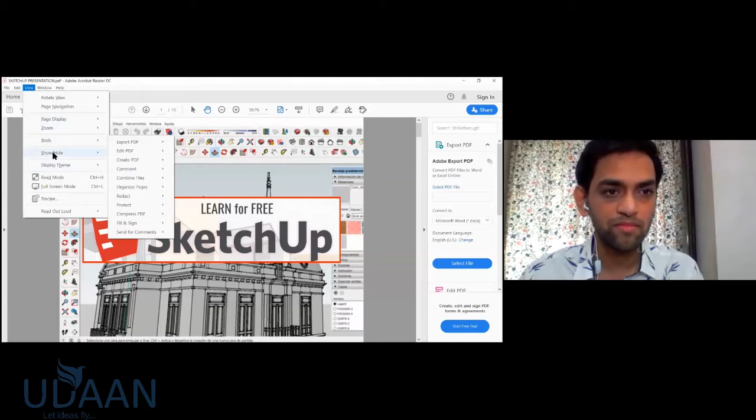SketchUp is a software used by architects and interior designers, also by product designers and furniture designers, which helps to make a 3D output before the actual object or building is actually made. So this helps the client to visualize what he is going to invest in. SketchUp is used in architecture, landscape design, civil and mechanical engineering, film and video game design.

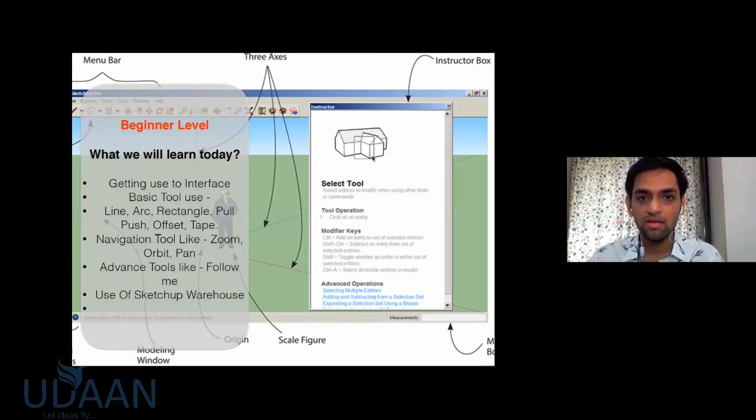So today we will learn about the basic interface of SketchUp, tools like line, arc, rectangle, push/pull, offset, tape, etc. So you get a basic idea how you can model your complex geometry in this software. Here are some of my works which I've done for myself and also for some of the clients which I handle personally. This is a thesis project of my friend, for which I did a SketchUp model. This took just 24 hours, and in 24 hours you can produce such a nice and beautiful model.

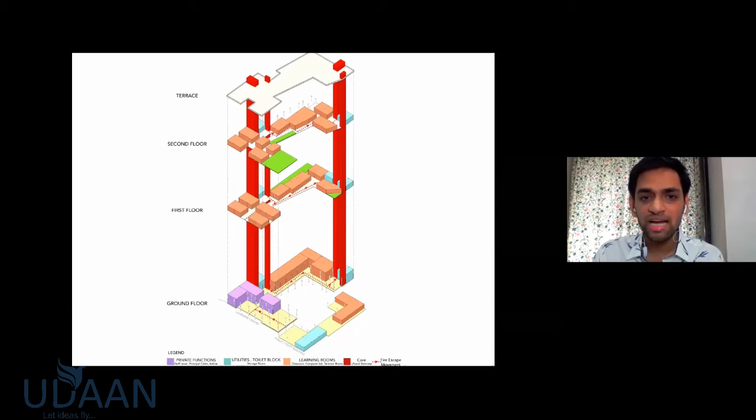Whatever you have in your mind or whatever you have on your paper, it can go into views and be presented as a JPEG image, or it can also be used in a diagram format, or as a wireframe conceptual drawing if you want. So it not just produces the views, but it also helps to produce diagrams and axonometric views.

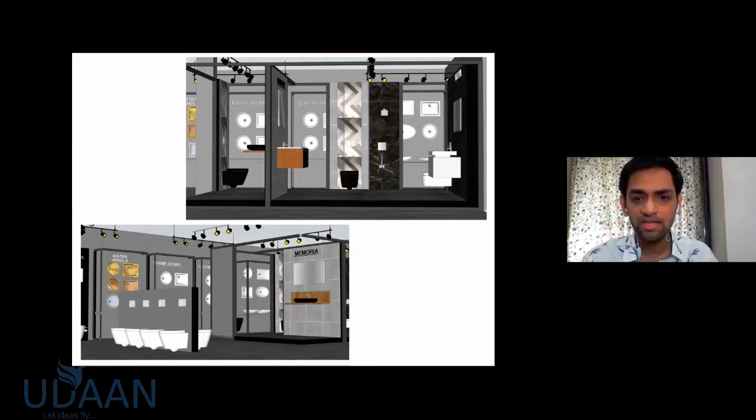This is an interior lift lobby of one of my clients, and these are two options which we made. Also, this is the interior of a shop. It's a sanitary ware shop. This is the interiors of an office building. The client was not able to visualize the space between the two chairs and the space in the meeting room and conference room. So we just made this 3D and gave them these axonometric shots, and then he was able to visualize what he's going to invest in.

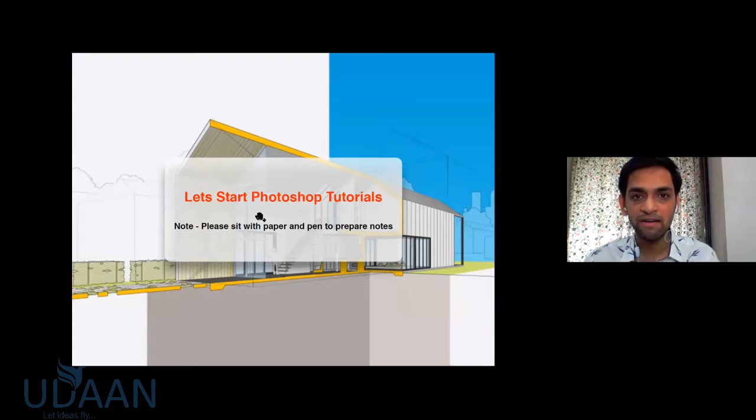So let's start SketchUp. Also, if you want to take down notes, you can go and get your pen and paper, and then we can start with the actual software. So should I wait or should I just continue?

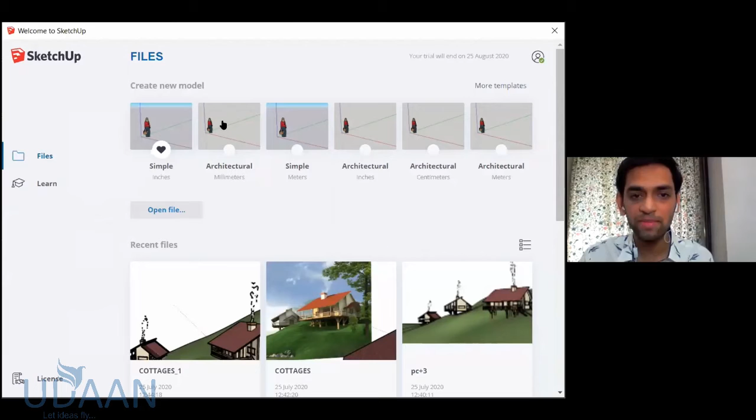I will start by sharing my screen and show you what are the basic tools which you need to start SketchUp. So whenever you start SketchUp, there is this box which appears. There are various templates which you can choose, but I will choose architectural millimeter over here because architects work in millimeter.

Is my screen sharing? 1 minute. Yeah. So yeah, can you see my screen? Yes. Okay.

So here on the top bar there are few tools. Also there are tools from this drop down menu. I will show you some of the tools, and these tools will help you to do the maximum of your work. But if it's a very complex kind of geometry, then we will go for an advanced lecture in this.

So I will start with this line tool. Line tool is basically just like a pen, and like a pen you draw freely. You can just draw whatever you want. Also, you see over here on the left hand side bottom, there is something called measurement. So whatever is in this SketchUp software is in real dimension, and it exists in the real world.

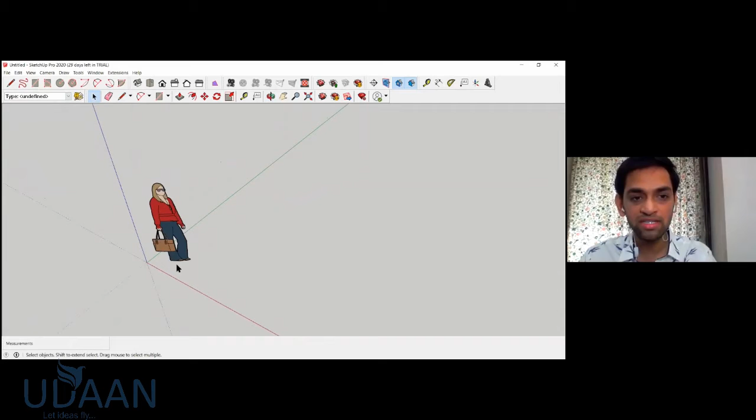So if you see this lady over here, SketchUp provides this one human figure in every version of the software. So everything we design is in relation with this human being. So just for an example, they have given this human. If you just measure the height, it's 1687 mm, which is the actual height of an average human being.

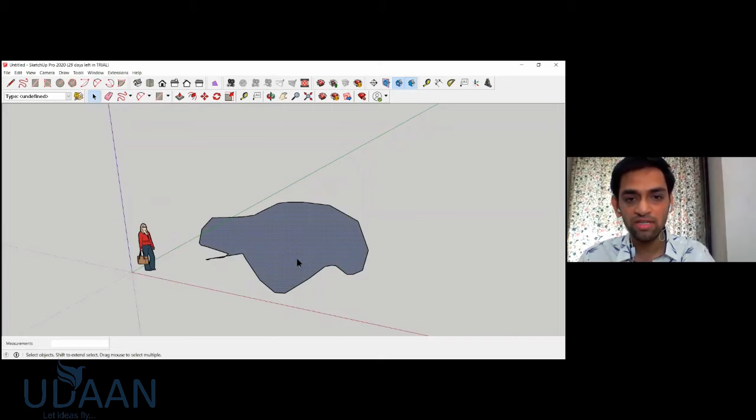So the second tool is a freehand tool, with which you can just freely draw whatever you want. And whatever is in gray, that's a surface, and whatever is in black, these are the edges. And whenever we select anything, that comes in blue. So if I select this surface, it becomes blue dotted. If I select this entire surface by double clicking on it, the black lines become blue because it's selected. I have selected the surface.

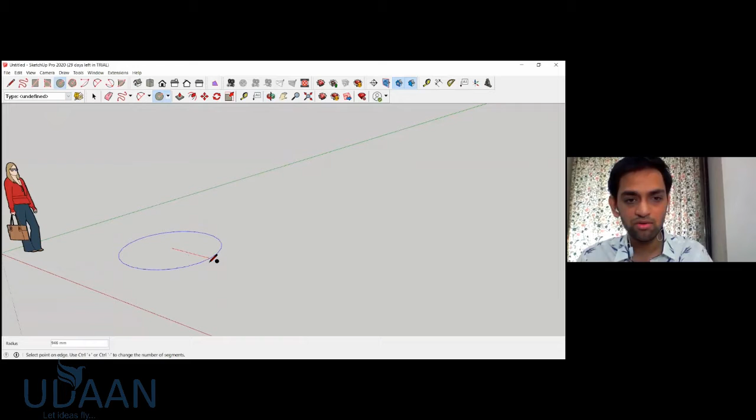Also, this is arc, rotated rectangle command, with which I can draw an inclined rectangle at any angle I want. We will not use this command very often, because if we want to rotate a rectangle, I will show you another tool for it.

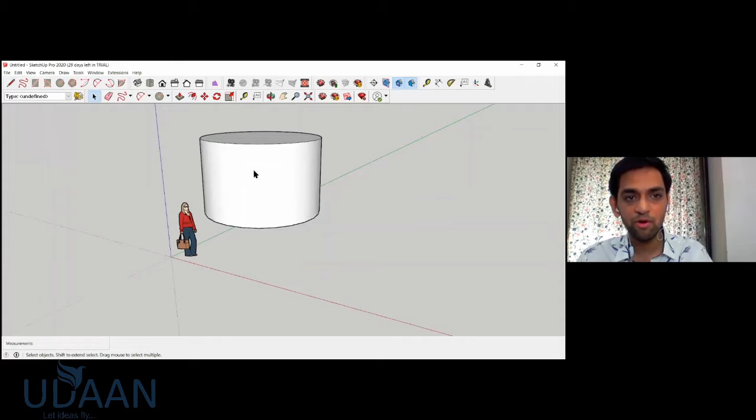Also, this is a circle, and if I pull or push, I will show you what's pull and push, it will become a cylinder. So square becomes a cube. Rectangle becomes a cuboid. Circle becomes a cylinder. And if you want to produce complex geometry and complex shapes, I will show you later.

I will show you what's an arc, how to draw an arc. Only this black line comes, and if I just draw one line, connect this line. So this is how you can make a surface.

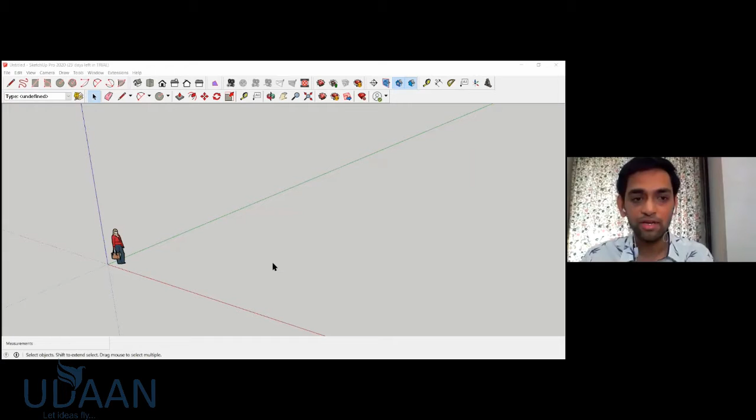I will start with drawing one small project like a house, how to draw a house from scratch, like you have done in your second, third standard. So we start from the plan. The plan is a top view of the house, so I will draw the top view and then I will go and create the other works.

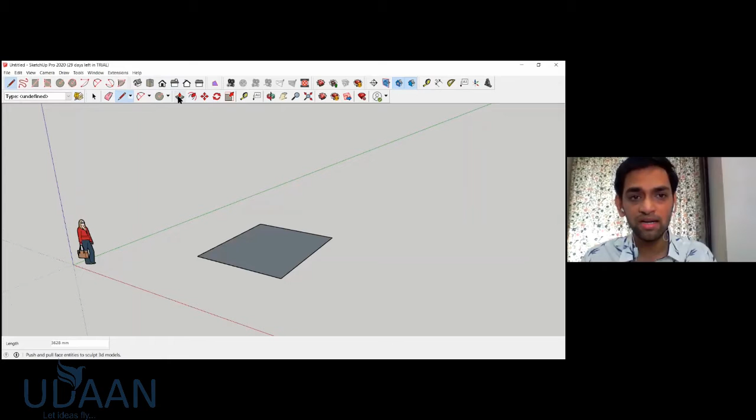So I will just show you one tool which I forgot to show you, which is pull and push. Can you see over here, when you hover your mouse over any command, it will give you information. If you want any more information, there is something called the default tray window. Go to window, go to default tray and show tray.

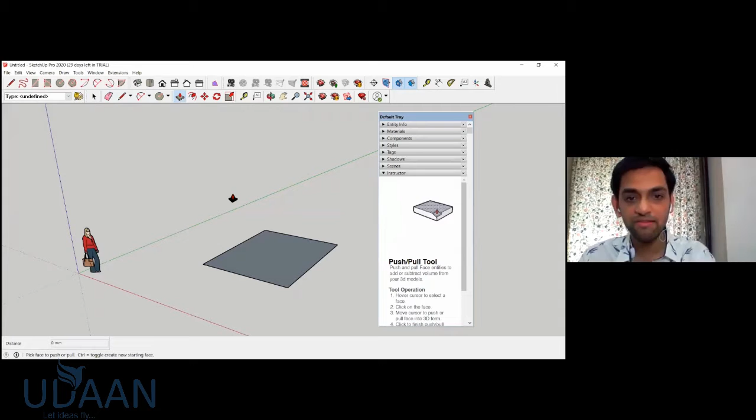One tray will maximize on your screen and you can see over here entity info. Sorry, in instructor you will see whatever command you choose, and it will show you how that command works in SketchUp. So if you forget anything, you can just refer to the instructor panel on the right hand side of your screen. And if I select pull and push, the instructor will change to the pull and push tool, and I can see how to do pull and push. I know from my previous experience how to do it. So you can just click P, which is the pull and push shortcut.

And whenever you go to any surface, it will be in blue dotted. That means it's selected, and then I can left click on my mouse and start pull or push of the surface. Also, I told you that SketchUp is in real world dimension. So whatever you do in SketchUp exists in the real world.

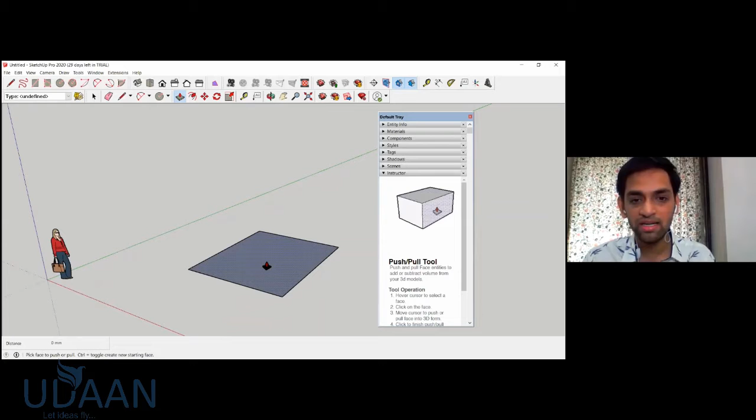So if you want to push it to a proper size, like I want this cube to push by 2 meters, I will click over here. I will type 2000 mm, which is 2 meters, and press enter. So right now this cube is 2 meters high. Can you see over here on the left hand side?

Also, if you want to measure, you can measure by using this tape measure tool. The tape measure tool is available on the top panel over here. You can go from endpoint to endpoint, and it says 2 meters. Also, this tape tool helps you draw construction lines. What do construction lines mean?

These lines will not interfere with your drawing entities, and they will remain as non-reacting objects. I will just show you how to draw a construction line. So, can you see this dotted line over here? This dotted line is a construction line, which means that it will not react to any object.

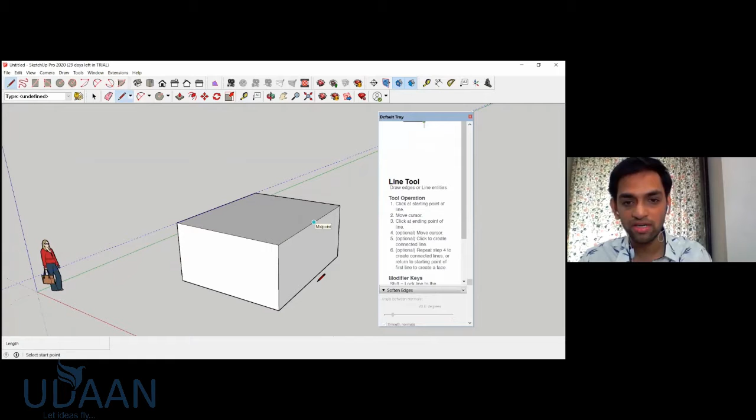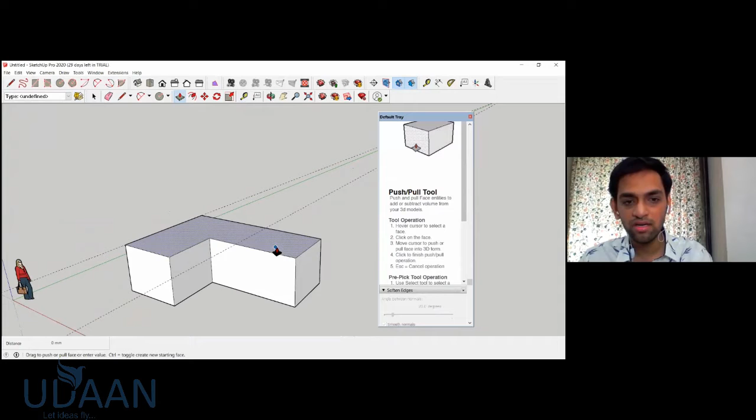Suppose I draw a normal line over here, and I draw a construction line over here. When I draw a normal line, it will create and interfere with my object geometry, and this construction line will not have any effect. For example, if I draw a construction line perpendicular to it, it will not have any effect because it's neutral. It does not react to any geometry.

So we use this line as a reference line, as a point of reference for any 3D objects that we draw in SketchUp. So we can start with our normal house. Can you see this house over here? We can start with this simple kind of house in SketchUp. I want the house to be like 20 meters by 20 meters wide.

So I will draw here. I will draw 15 meters right now. 15 meters is 15,000 mm. You do not need to write mm over here because this file is already in mm. If you want to check the file dimensions, you can always go to Window in the top panel and go to Model Info. When you go to Model Info, you will see that the format is decimal and the length is in millimeters, which is mm.

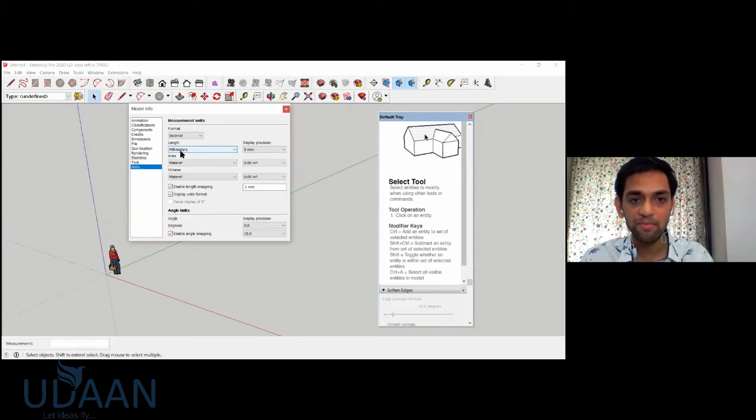That's why I do not need to write mm every time. I will write 15,000. Then I will go 20 meters. Then I will go 10 meters.

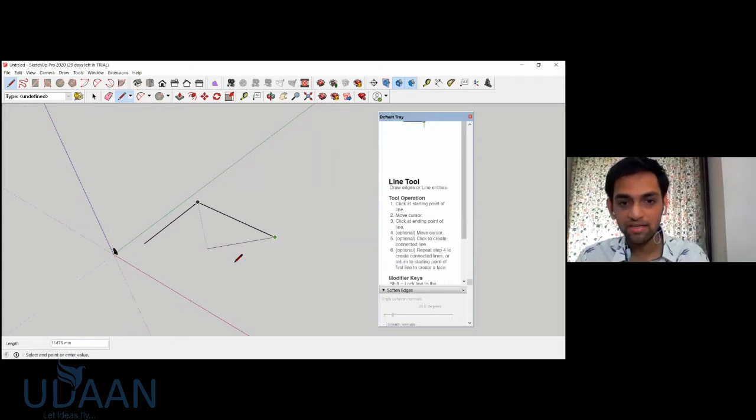So if I want to find this point over here, and I do not know where to stop, I will click over here and just move my mouse over here. Do not click anything. I will just move my mouse so that SketchUp knows that I want this point, and SketchUp will now tell me where this point is. So can you see this red dotted line which appears on the screen?

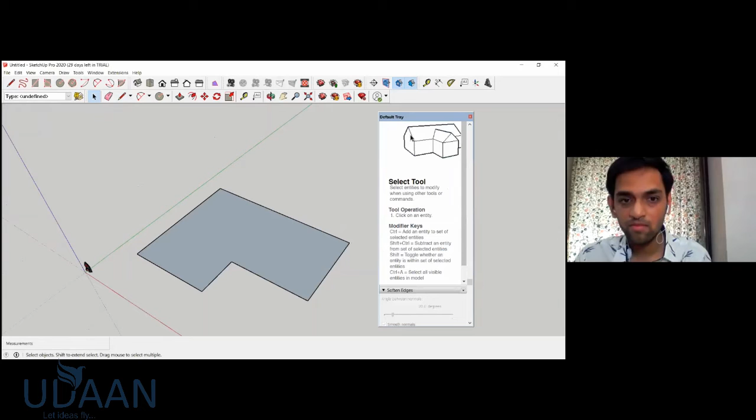Screen? Your video has stopped. Some connection issue. Hello. There is some connection issue. Your video is... Okay. I will just check my connection issue and then I can resume. Just give me 1 minute.

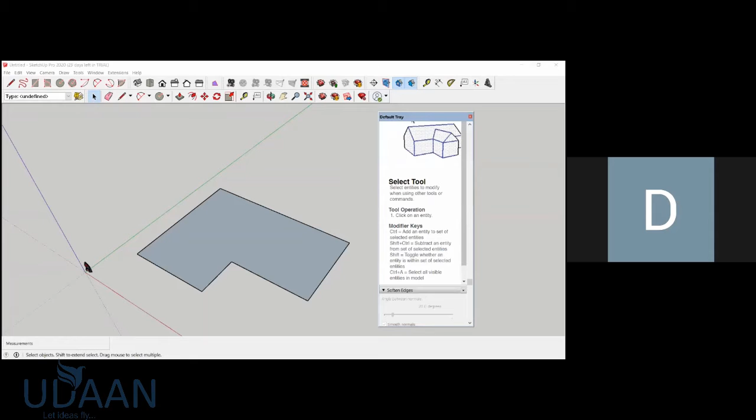Hello. Yeah, I fixed my connection issue. So I will start.

So this is a plan of a house which I started. Can you see this surface now? I will just pull and push this surface. A house is usually 3 meters, but I will take it to 4.2 meters so that you can see it properly on your screen.

Also, now I want a pitched roof, like a sloping roof of a house. So I will just divide this into 2 parts. As you know, I do not know where the center point of this is. So I will just tell SketchUp to guide me. I will click over here, which is the midpoint.

And can you see the red dotted line which is coming over here? This guides me. I will click over here and take a horizontal line over here. So these red, blue and green lines are very important while working in SketchUp.

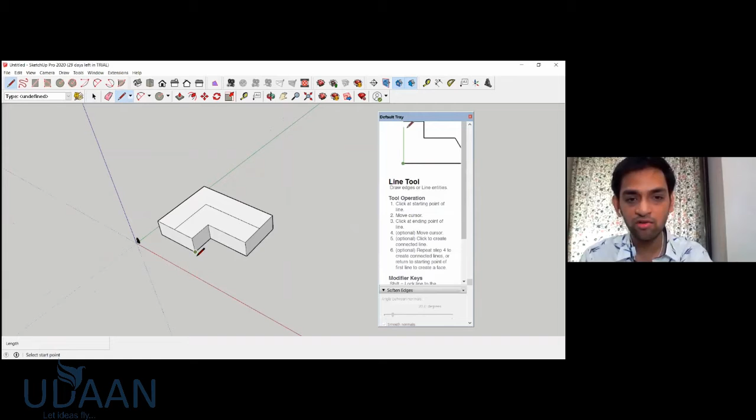Whenever you see this line, the red line is the x-axis, the green line is the y-axis and the blue line is the z-axis. So if you don't know what is parallel to the red line, SketchUp will tell you by prompting that it's on the red axis. If you don't know what is green, similarly SketchUp will prompt you that it's on the green axis. So also the blue axis, similarly SketchUp will always show on blue axis so that you do not confuse yourself when you are doing 3D.

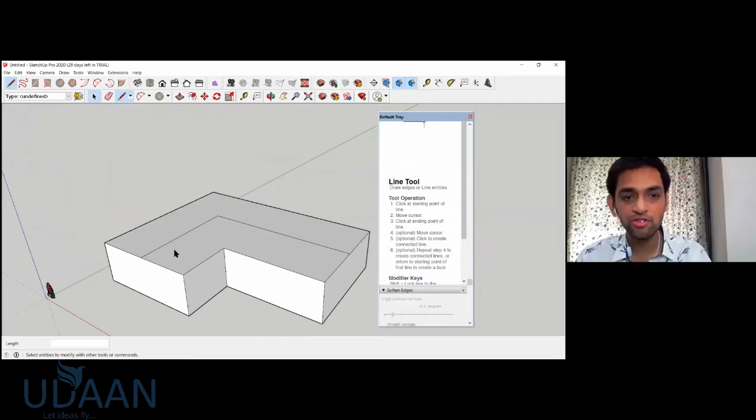This you will only understand when you go and do 3D, because sometimes you want to pull the thing up but it goes sideways. I will show you how. So can you see right now it's on the blue axis, but if I am not sure and if I am not concentrating, it can go into the green axis also. So I think it's going up, but right now it has gone sideways. Can you see? Nothing has push pulled.

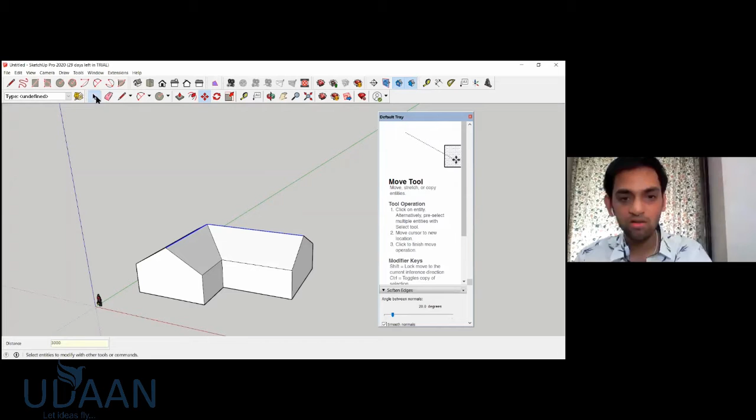So I will just press M. M is the move command, and I will make sure that it's on the blue axis. So I will go here, I will type 3000. I want my roof at 3 meters. Then enter. So this is how I create a house. Also, I will now add a few more details in it, like doors, windows, etc.

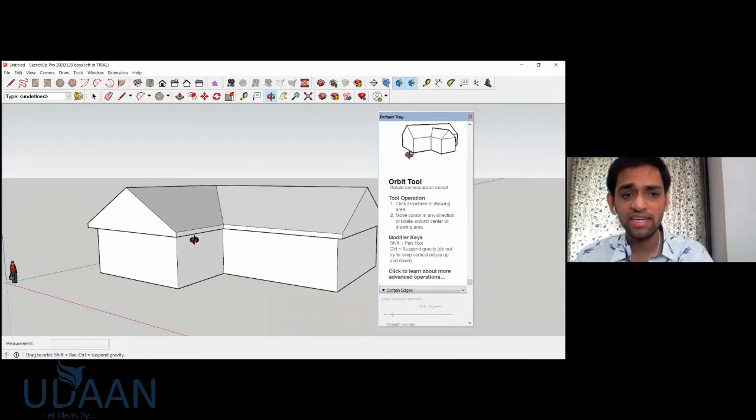Before doing it, I will just use a tool called the offset tool. So what I did is I just offsetted the base plan so that this house looks realistic, because the roof is always offsetted from the main structure so that rainwater or snow falls directly on the ground and it does not hit the wall. So this is the technical part of it, but I just wanted to share it with you.

Now I will make doors and windows over here. So how to make a door over here? Now you know that whenever you start from the midpoint, the door frame is in the middle, so I cannot start from here and go over here, because then it will be off center. So I will use a construction line over here so that I know what's the midpoint and then I can start with it. So I will go to the tape tool. I will click over here.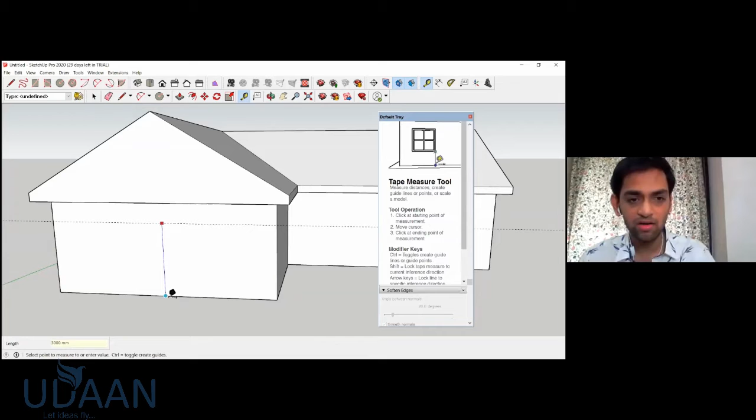Yeah, then you see, I will say I want a door of 3 meters. Sorry. Yeah, so the height is 3 meters. Now this is the midpoint of the door. I want the door to be 2 meters wide. So I will take 1 meter on the right and 1 meter on the left hand side. So now can you see?

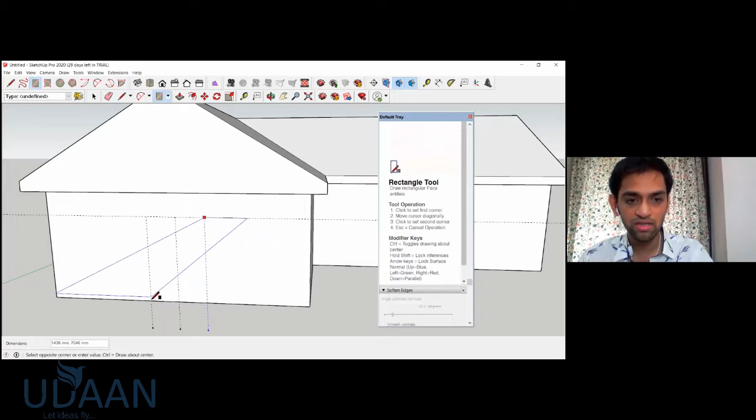Now I will make a rectangle over here. Rectangle, you can take it from here, or you can click R as a shortcut key. Now this becomes like a door shape. Now I will take a rectangle from here to here, and I will make a door frame over here. Door frame you can do by offsetting the entire door outside, or I will just show you one more command. You can take it outside by 50 mm.

But can you see over here an unwanted geometry is created, this part. So what I will do is I will just click on the 3 lines which I want to be offsetted. I do not want this line to be offsetted because then it will create an unwanted geometry. So I will just do it by 50 mm. And can you see now it's a clean geometry. We always want this model to be clean so that when we edit it further, if there are any changes ahead, we do not struggle with this model. Otherwise, we have to do the entire thing again, which takes lots of time.

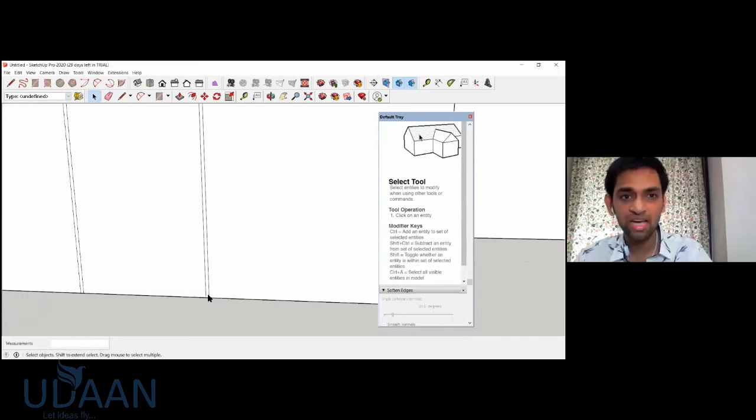I will just push it by 100 mm. So now this, and I will push this door by 100 mm behind, so that this is a door over here. Also, I will show you how to place an actual door, and it will look like a realistic door.

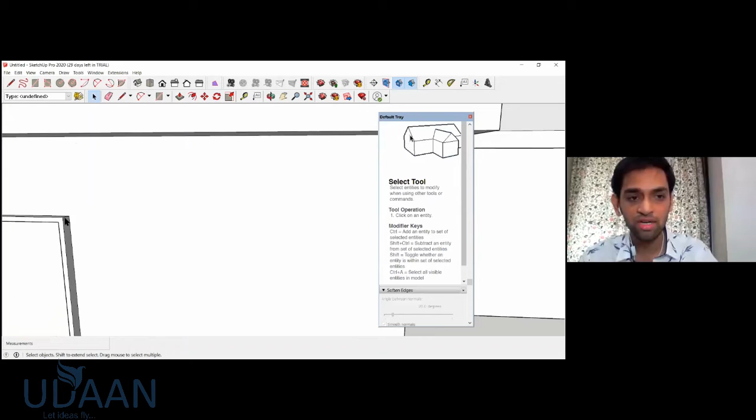I will start with my windows. I know that windows and doors have a lintel level. Lintel is the top level of this frame, and the window is always at the same level. If you see in your house also, the top of the window and the top of the door are always in the same line. So I will take this over here. I know that I want the window top also at 3 meters. So I will start making the window. I want a window of 2 meters.

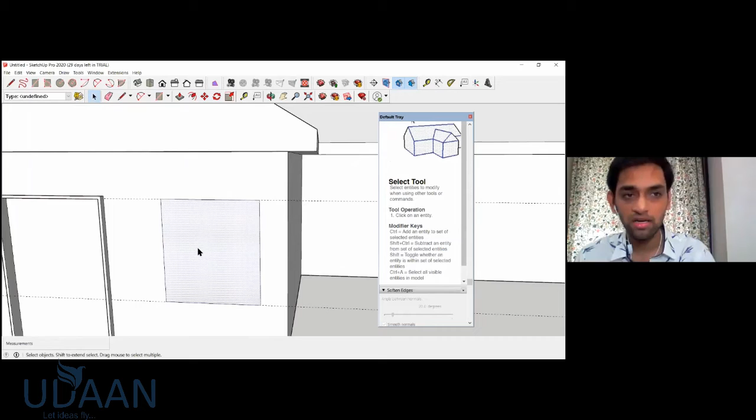So I can draw a window. I will draw a rectangle. I'm drawing a very freehand thing right now, but if you want a perfect thing, you can enter the size on your keyboard. So I will offset it by 50 mm, a 50 mm frame over here.

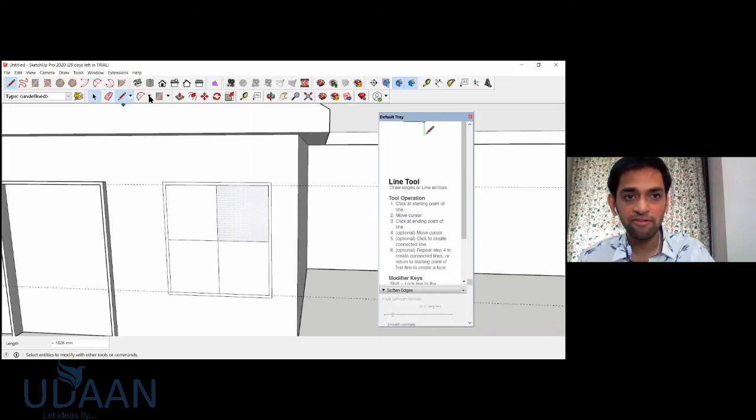I want a wooden panel window. I will just divide this into 4 parts. You can know the midpoint when your mouse suddenly stops when it hits the midpoint. So you will know what's the midpoint, and also the midpoint drop-down menu comes over here, so you know. So now I will just offset everything by 50 mm inside, or 25 mm over here, 25 mm.

Also, when you see that this surface is blue, this surface is getting selected and the action will perform on this surface only. So now I want this frame, but this line has been created by us, and now it's not required. So I will just delete this thing and I will push the frame by 100 mm.

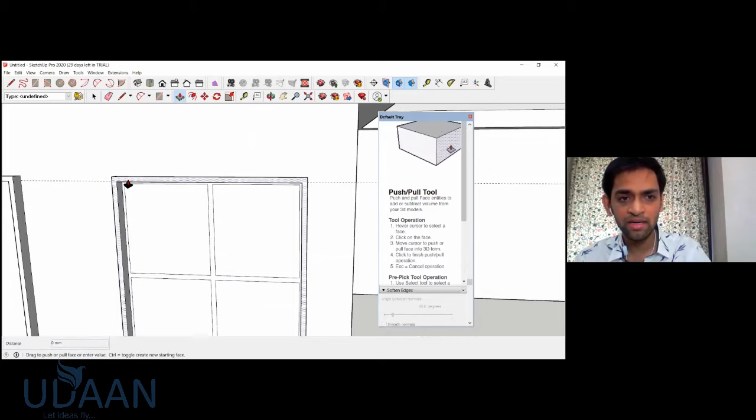If you see, I am just dragging this point over here because this board should be in the same line. So when I do this, this is also offset by 100 mm from the surface. I want this also to be offset. So I will just save my time by pulling this and clicking it over here instead of entering 100 in the keyboard. Also, I want this frame to be outside by 50 mm. I will do 50, enter. So this is like a wooden frame over here, and this is the window.

Well, to make it more interesting and more realistic, I will use something called the bucket tool. The bucket tool is also a material tool, which shows the materials over here. It has all the elements in it, for example, whatever is used in the building industry like asphalt, concrete, brick, and all this is in ascending order. No need to search anything when you have tight deadlines or when you are just out of your mind while using this software. Everything is in ascending order.

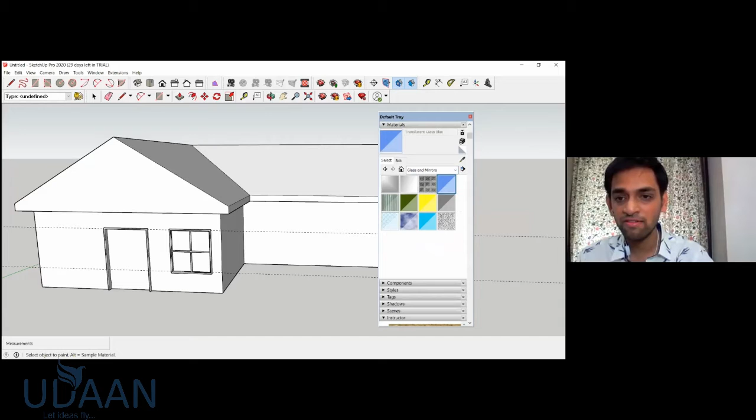So I know I want to do glass. So I will go to glass and mirrors over here. I also press G on my keypad, so it will take me to glass. I will choose this translucent color. Material tool. Can you see now? It's a transparent glass, and I can see through my glass window.

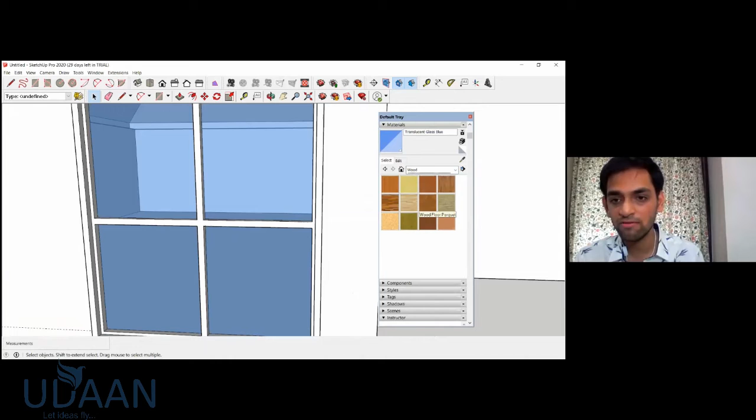Also, now this surface is wooden. So I will just press W, and it will take me to water because whatever starts with W will come first. So I will go to wood over here. I will just take any wood surface I want, and I will click on this. So now this is a wooden panel window.

Also, I want to now copy my window. I will press my left click continuously and drag, and can you see this black color window over here? I will leave my mouse cursor. I will press M and Control. When you press Control, you can see this plus sign coming on the Move tool. The plus sign means it copies. So it's like Control C, Control V, but I will just press M.

So I will just repeat myself. I will drag and drop over here. I will press M, and I will press Control. Whenever I press Control, you will see a plus sign coming up on the bottom right-hand corner of the Move tool. I will place one. I will just select one midpoint over here, and one midpoint over here. Automatically, my window gets created. No need to do it multiple times. Whenever I create it once, I can copy paste that entire thing.

So I want a window over here. I also want a window here. So you can play with the software as you want and as you wish. Also, I told you that now this is a door. I want one actual door in it.

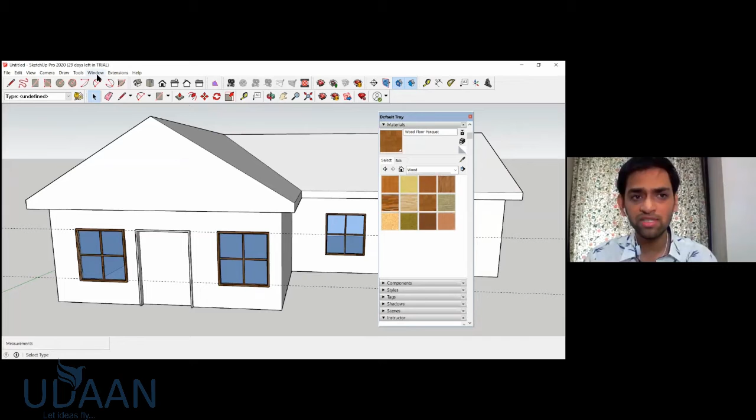So there is something called 3D Warehouse. 3D Warehouse is a library of components which other SketchUp users use, and whenever they are done with their model and want to share, they can always go to 3D Warehouse and share their model so that it becomes like a public library of all the SketchUp components.

So what I did, I went to this window menu, I went to 3D Warehouse, and a new window opens over here. Or you can go to 3dwarehouse.sketchup.com also. So I will type door because we want that. Wait for a few seconds, because if your internet is not so strong, it will take some time.

Now you can see there are various options of doors available. I will select this door over here and download it.

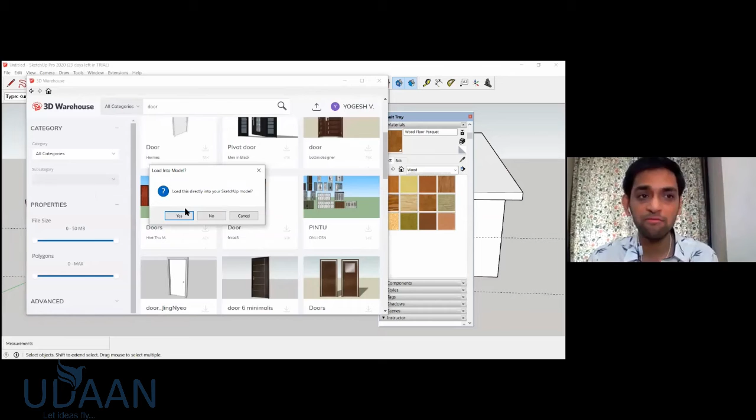This asks me to load it directly into my SketchUp model. I can say yes or no. If I say yes, it will directly load into the model I'm working on right now. If I say no, it will save it in my downloads panel. So, downloading.

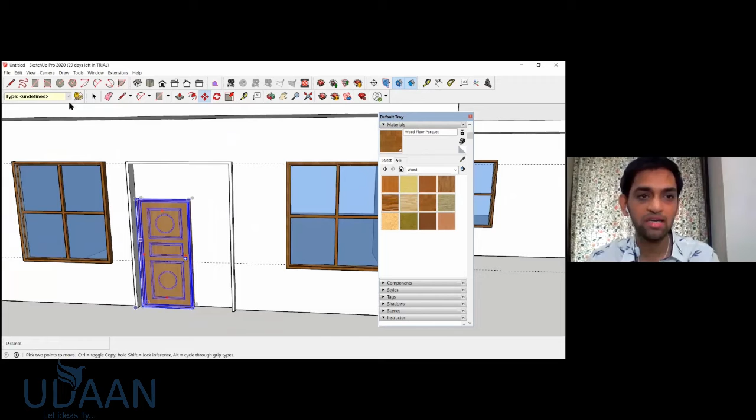Now I will place my door over here. You can see that the door frame we made is bigger than the door I imported from outside. So what you can do is just scale the entire thing. I will place this over here.

I will press S, the shortcut for scaling, or you can use the scale option available in the top panel. I will take it over here. Now you can also see that the door is not in line.

There are various control points. I will show you the control points of this. Can you see there are three here, three here, and at the bottom also there are three points. These are the control points, and you can control it by clicking on them. You will understand better if you try yourself.

What does each control point do? If you want to scale it in a uniform manner, you can press S, and can you see over here it says 'uniform scale about opposite point'. This means it scales uniformly throughout, so it doesn't get distorted.

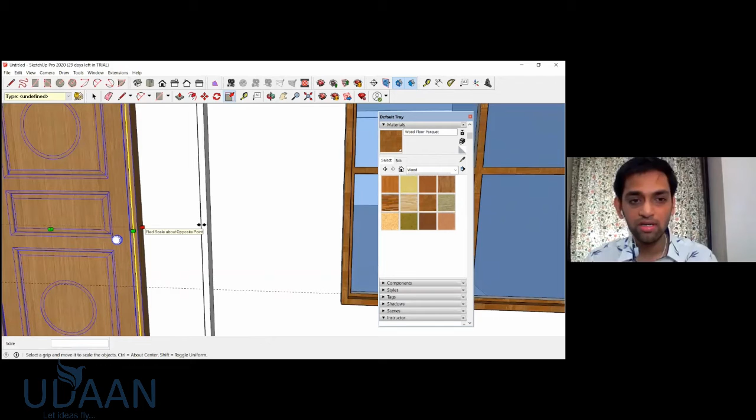So the door came over here. Now I want to add some materials and textures. This line we don't want, so I will select this line and delete it.

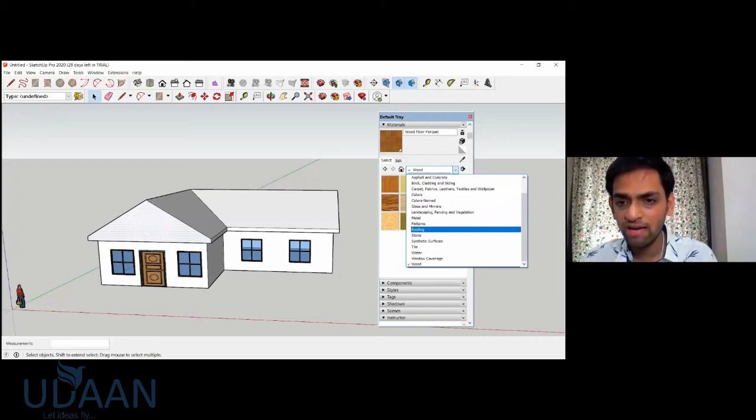Now can you see, I want some material here, so I will go to the bucket and select roofing patterns. There is something called roofing. I will go to roofing and select any of these. I will select this one.

Whenever you want to do any view or model, just work on whatever you want to be seen inside the view. If I want this view to show to my client or to any of my friends, I will just work on this view. I will not go behind because that's not being seen, so why waste our time modeling the entire thing which isn't visible? But we are just learning right now, so I will show you anyway.

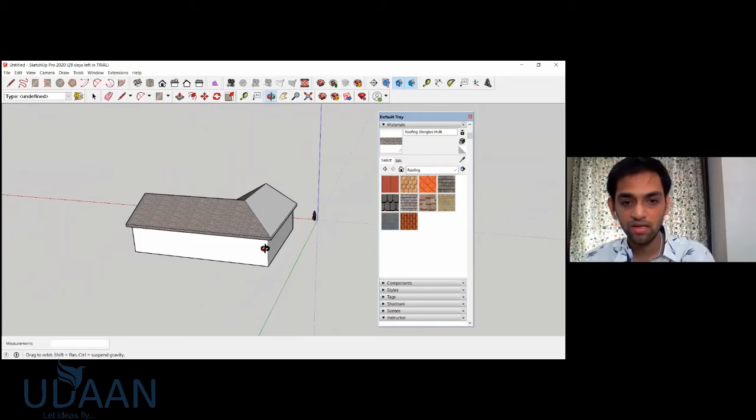Now I want a pattern on the walls of the house, so I will go to cladding, the brick cladding and siding. I will select something like this, or this. This should go in a similar color tone to the roofing because it cannot be too dark or too light; it should match in a similar way.

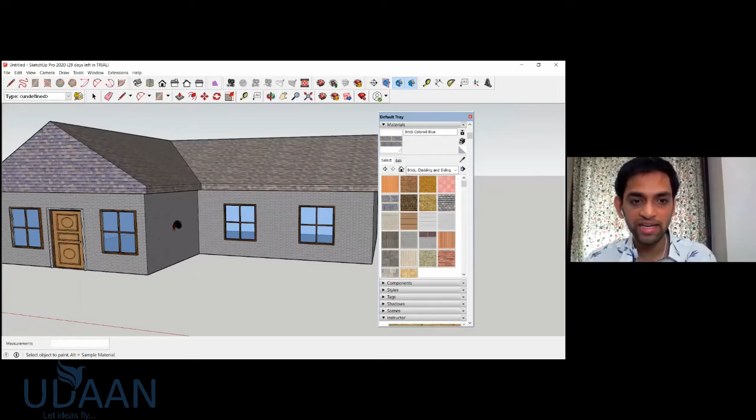So this is how it looks. Also, if you want to change the intensity of this pattern, you can click over here, or click Alt so this bucket will change into a dropper. When you click this, you get the edit panel, and you can play with the intensity of the brick. Also, if you want, you can reset the color back to whatever it was. Can you see, whenever I change the bar over here, there is something called reset color.

I will just click that, and it goes back to the previous original pattern which SketchUp provided to us.

So right now, I do not want this object to get associated with different objects, so I will make it a group. What is group and components? I will show you right now.

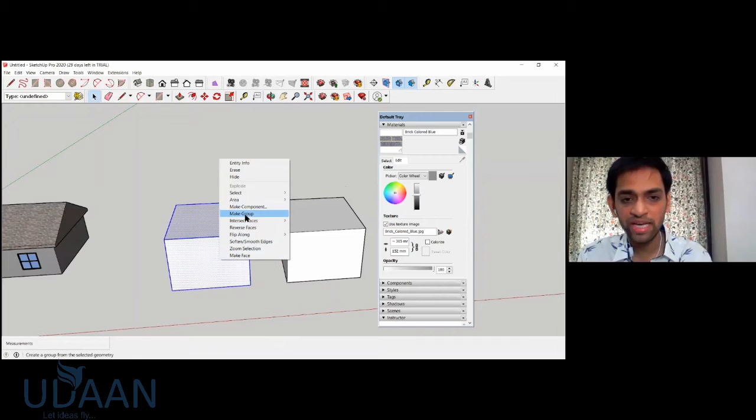So now if I take two similar planes, I will make one of them a component and one a group. So: make group, make component.

So I will do some color over here. I will do red color, and I will also do red color over here. Now the left hand side is a group and the right hand side is a component. This is a component and this is a group.

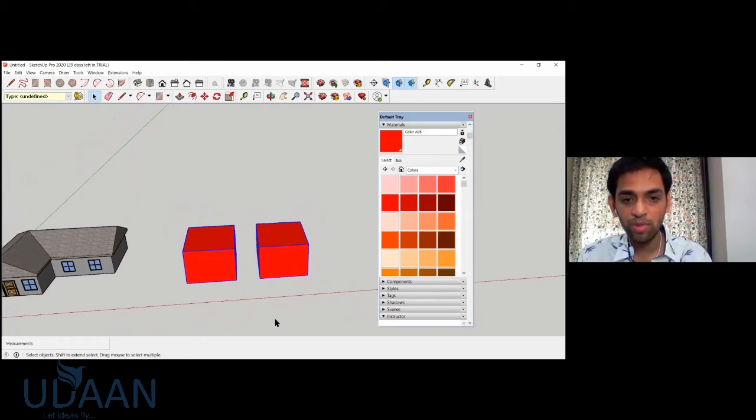So when I copy paste this thing, and if I change my original group to blue, none of my groups got changed. But if I change my component to blue, each and every component got changed. It's not just the original. If I just select this and change it, then also everything will get changed.

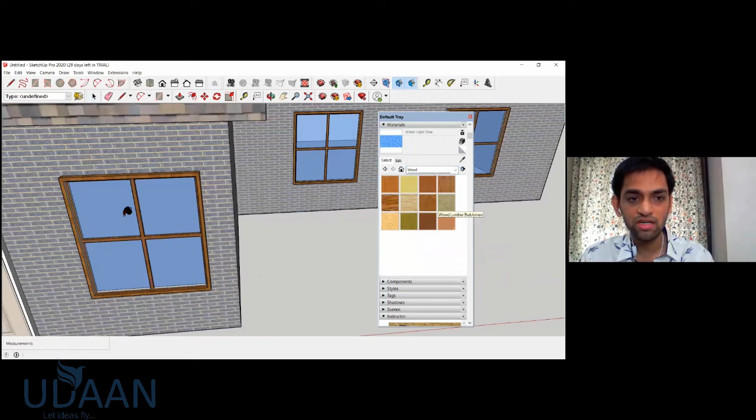So whenever you are repeating objects, just like windows or doors, you can just make it a component and then copy paste it, so whenever you change one of the objects, it will get changed in the different objects. For example, if I want to change this color, none of my windows will get changed because it's not a component. So that's the difference between component and group, and that's a very smart way of working if you want to do everything in a very easy and handy way instead of doing everything manually.

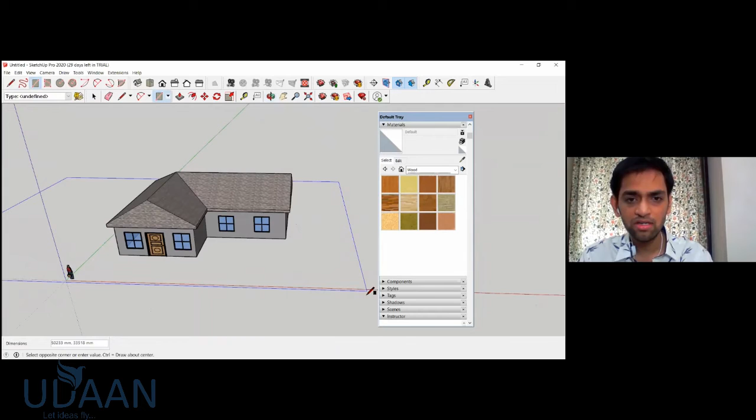I will draw one plane over here. This means this is the ground on which the house is resting.

Now I will offset it and make like a compound wall, and I will just push this up. I will make it a group so that I can edit it after making some changes, like taking it 1 meter high.

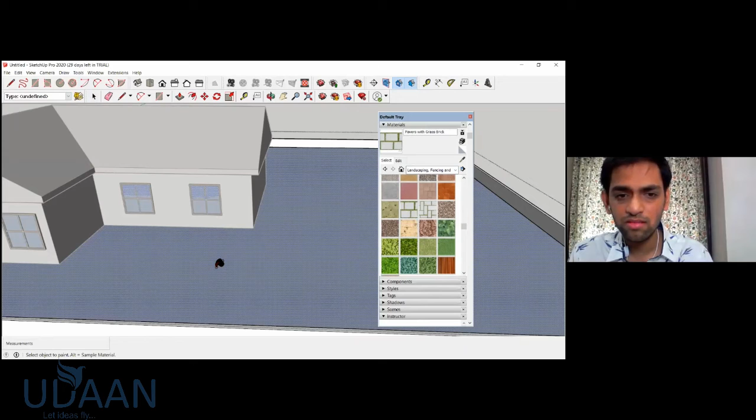Now I want this to be like a landscape part, so I will go to landscape, and can you see there are pavers with grass brick, and pavers with grass herringbone. Herringbone pattern is like a brick pattern. Can you see over here? I have done this.

And also I want this compound wall. So I do not want this compound wall to be like a concrete wall. I want it to be like a planter kind of thing, which you see in very modern buildings and modern compound walls. So it's just grass which is growing around it.

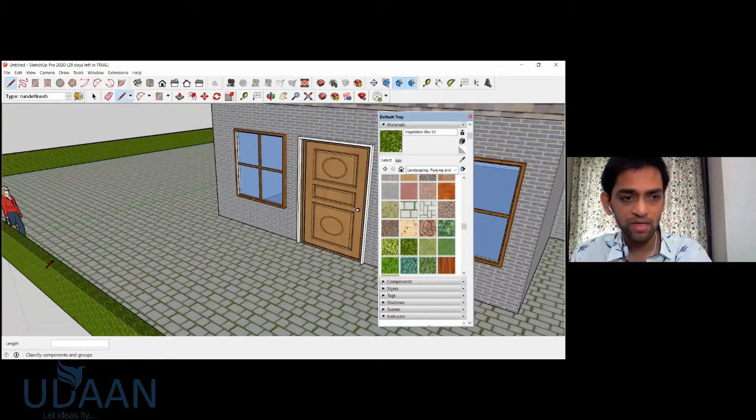I want this, so I will just cut it from here because I will go inside the group and then I will be able to edit it. So whenever you go inside the group, whatever is outside the group will go into a pale color kind of thing, so that you know it has gone inside.

You can also change the setting, but I will advise you not to change any settings over here, because whatever SketchUp has given is a very smart way of working. And if you're not comfortable, you can always change it. Also, now you can see this gate has been created.

Now I want to add some planters over here also. So I can go to 3D warehouse and get my planters over here. But I have already downloaded the models from 3D warehouse, so I have some planters.

So when you see these creepers over here, I want creepers to grow around the house. I will just copy paste. Now this creeper is horizontal, but I want it vertical. So what I will do is just rotate it. There's something called the rotate command over here. I will take it and rotate it vertically, and then I can place it.

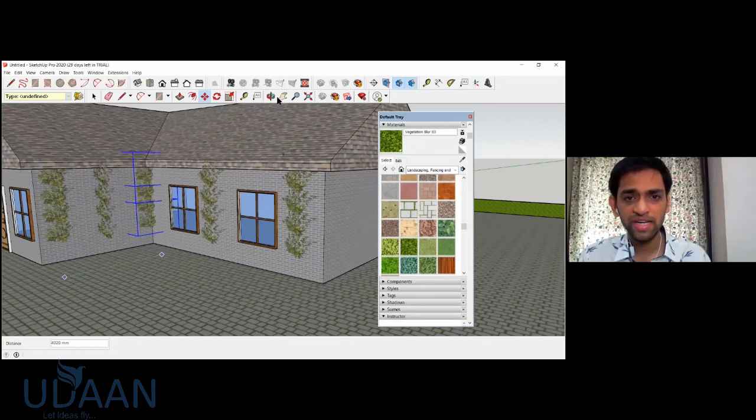So now it looks like the planters are growing above it on the walls of the house, which also gives a look like it's a very ancient house and of a very medieval period. So now can you see over here, it looks more realistic.

Now I want to add some trees over here so that it looks like a very realistic view, and also I will add the sky over here. I have already downloaded trees over here. I will show you what is the specialty of this tree. If you see a SketchUp 3D model, everything is in 3D. But now some components are in 2D, and how we can make it look like 3D, I will just show you. Can you see over here? One minute.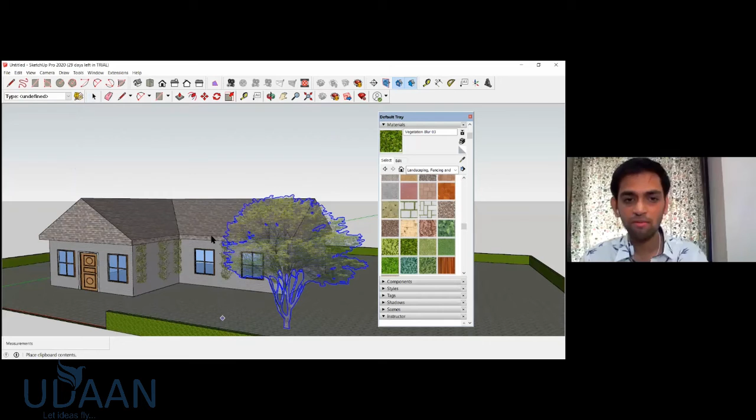So can you see over here, this tree is in 2D, but I will make it look like a 3D object by just manipulating the settings in my component style. I did Control C, Control V from my previous tree file. I will right click, select everything by double clicking on it, right click and make group, or make component, and there is something else: always face camera.

Face camera is whenever we see anything that faces the camera, so I will just select that, tick mark on that, and create. You can always name the thing, or you can just leave it so the default name will come up automatically. So I will do create.

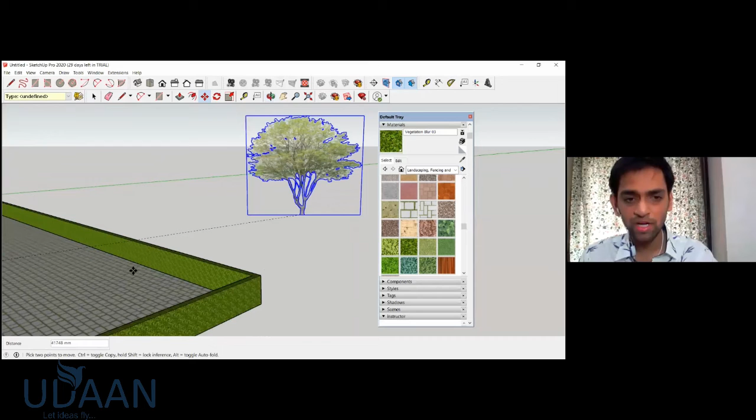So whenever I move my screen, move my camera, the tree will rotate. But when you see it in the plan, it will be a 2D tree. The benefit of this is that when you make a complex, bigger model and everything is a 3D object, your file becomes very heavy and crashes. So this is the best way of dealing with your 3D file so that it does not crash your computer or slow down your PC. So I will just copy paste it.

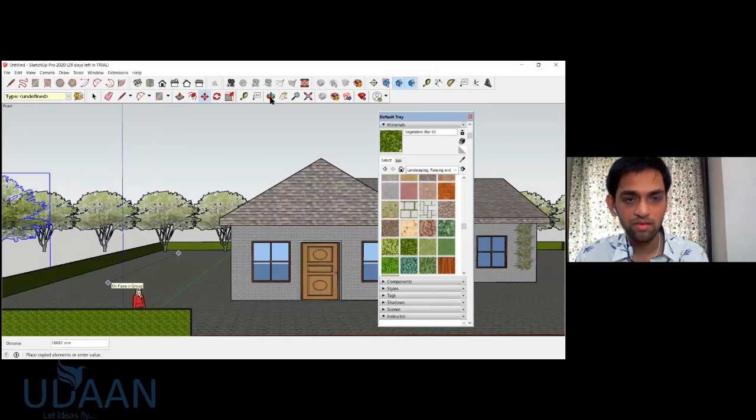Then you see I just copy pasted it, and wherever I move my camera, the trees will move according to my camera. So this is what it is.

Also, I can add more people. So this SketchUp lady is also a 2D thing. If you see it in the plan, it's 2D, like a paper, and it will move according to my camera. They have already done the settings and given us this model.

So I want to add one car over here, so I can go to car. Now I will do Control C, Control V, and copy paste this car.

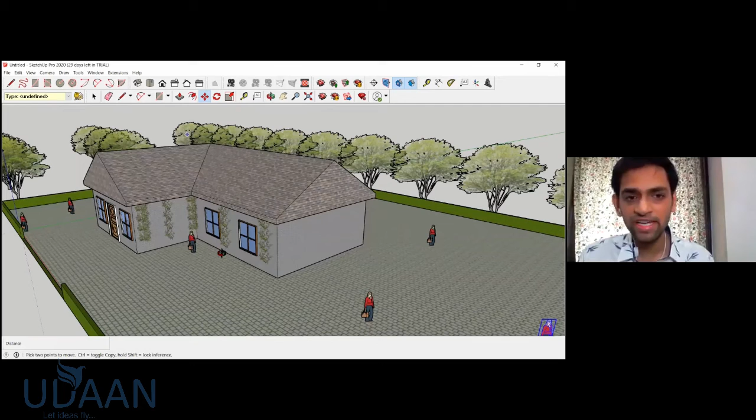Also, one thing you have to note: whatever you download from the SketchUp 3D Warehouse, everything is in 1:1 dimensions, so you do not need to scale. But if you need to scale, you can do it. Everything is in 1:1 scale. So I will place my car over here.

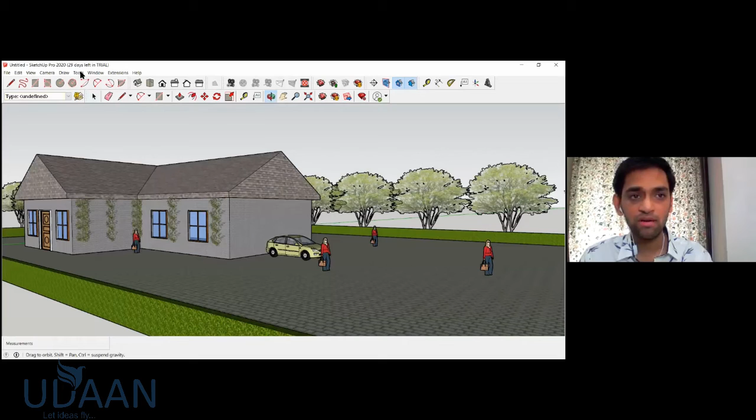Now I will go and set the views. But before setting the views, I will just do some minor corrections in the styles. So I will go to show tray. There is something called styles over here. What is the styles over here? I will just show you.

I will go to assorted. There are various templates available. I will go to a few of them and explain you. This is just like the filters you use in your Instagram or any photo editing app. So this is just like that, and you can see different styles, different editing options which are available in the 3D viewing model.

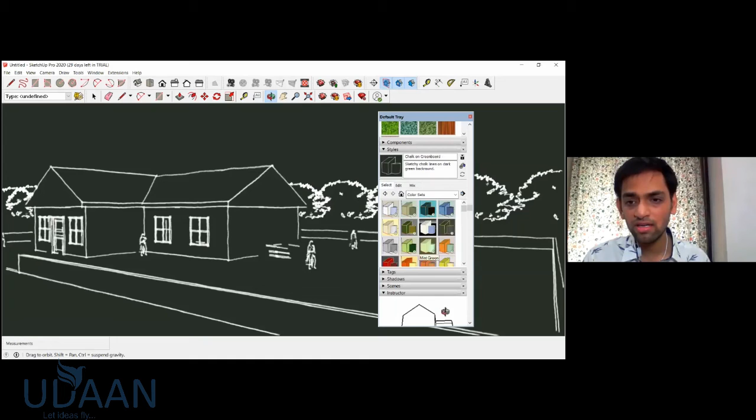So you can do it as a wireframe kind of thing, or you can do it like a conceptual. When the building is in conceptual stage, you can do it like a sketchy effect kind of thing. So yeah, this is just editing of that thing. If I want to add a style over here, a sky over here, I can do this.

Also now you see that these lines are in orange, so I will go to edit. I will change this orange to black so that all my edges are black. And now you can see that the blue sky has got added.

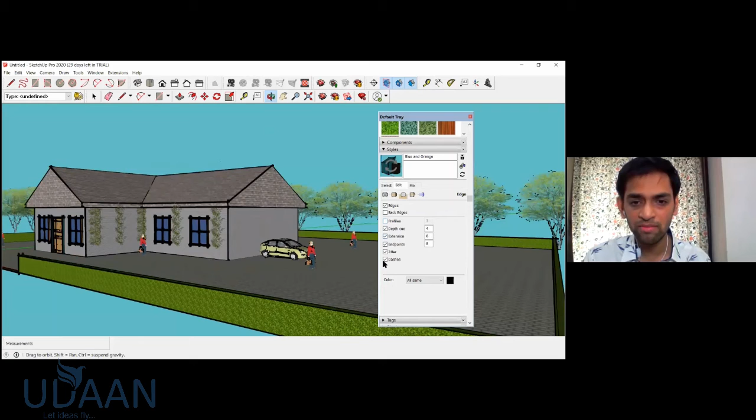So also I will go to edit. I will remove these dashes. I will remove all the things which are over here, and I will just keep edges over here. So when I click on everything over here, what effect will it be? It will be a very dark effect, and lines will be very thick, which I don't want in my model. I want a very fine line, so I can show a proper realistic view.

I will go to view, I will go to camera, I will go to view, I will go to animation, and I will add scene. So whatever is in front of you will get added as a scene over here. Now can you see that scene one has got added?

Also, if I want to add some other scenes, I can do it by rotating my model and taking one snapshot over here. I will right click over here and add scene, and add. Or I can also go to view, animation, and add scene. Either way we can do this.

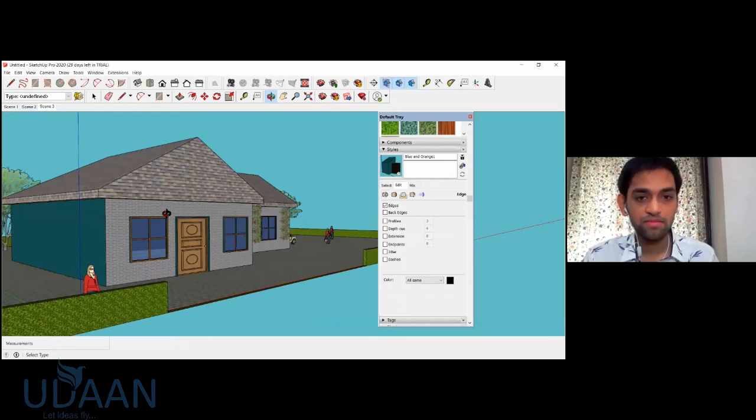So yeah, we can also add shadows over here. Also remember, whenever you turn on the shadows, turn them on only while you are adding the scenes, because it takes too much of your RAM memory and graphic card, and it will slow down your PC if your model is very high in terms of quality and size.

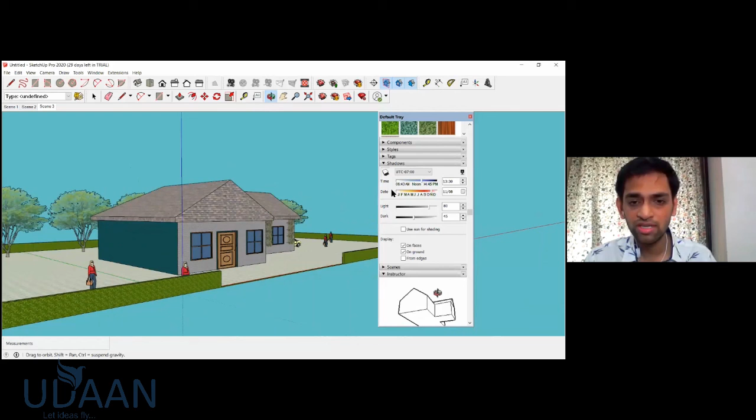So can you see right now, you can play with the shadows. But as I told you, turn this on only when you are taking down your final scenes and exporting as a JPEG. Please do not turn on the shadows and start working on your model, because then it will take too much time loading everything. And whenever I'm saving my file, I will turn off my shadow and then save my file.

So I will do save my file as. We'll go to this desktop and I will say SketchUp model. So I will do save. Whenever you save the file, I will show you what output it has come as and what format it is in. I will just save these views so that you can see what the output is.

File, go to export, go to 2D graphics, and I will save it as Udaan SketchUp model, and go to JPEG. You can also save it in other file formats such as PDF, but JPEG is most usually used for images, so I will use JPEG. If you want a very high quality, you can play with the pixels in it. I have already set a high quality, which is 5000 pixels.

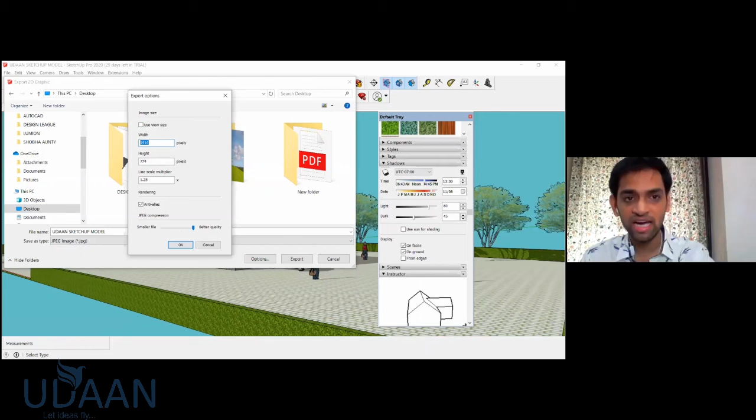And if you want a very low quality, use the view size. View size is whatever you see on the screen. If you take a snapshot or if you use this, both images will be the same, a very low quality image. I will do 5000, which is very high pixels, and it will produce a very high quality image of my model. So I will export.

Now I will just turn off my shadows and do Control S so that it saves my model. Please never ever turn on your shadows and do Control S, because then it will take too much of your RAM memory.

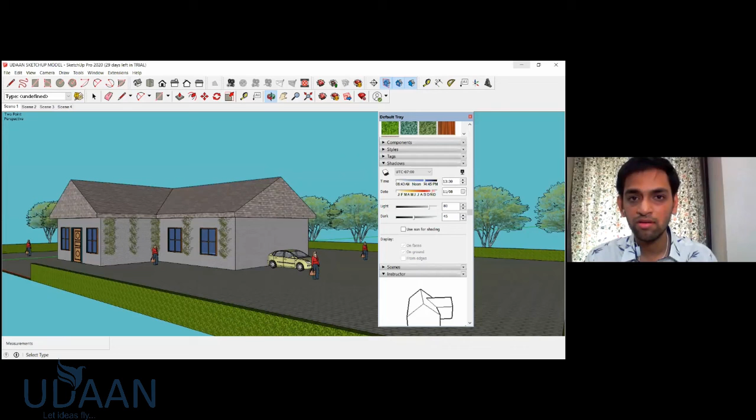I will just minimize it and I will show you. One minute. You cannot see my screen, right? I will just share my screen again. One minute. I will just open the folder and show you. Yeah. I will go to share screen and can you see over here, Udaan?